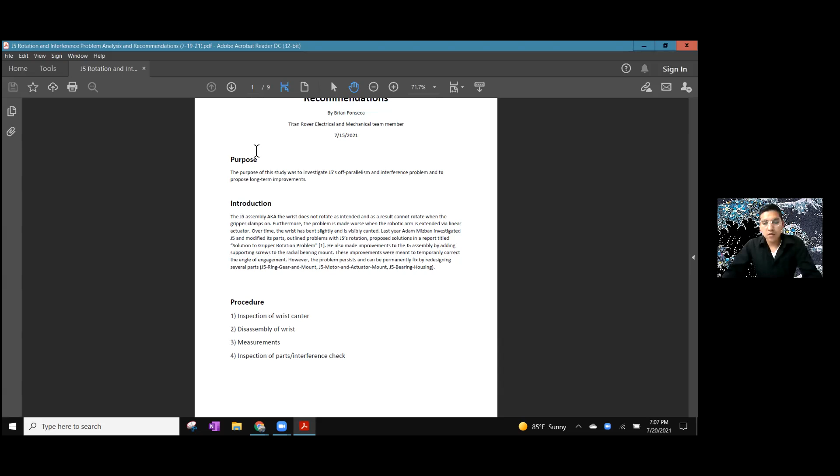Okay, so I'm just going to be talking about the results of, I guess, the study, if you want to call it that, of the cocking of the wrist. It's supposed to be straight up, and it's kind of cocked, kind of cantering. So basically, the wrist was not straight, and there might actually be a couple reasons, but I'll go through this kind of quickly.

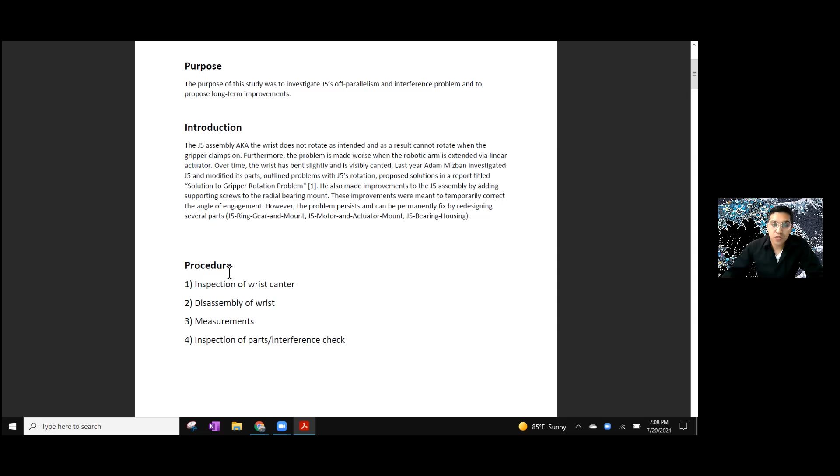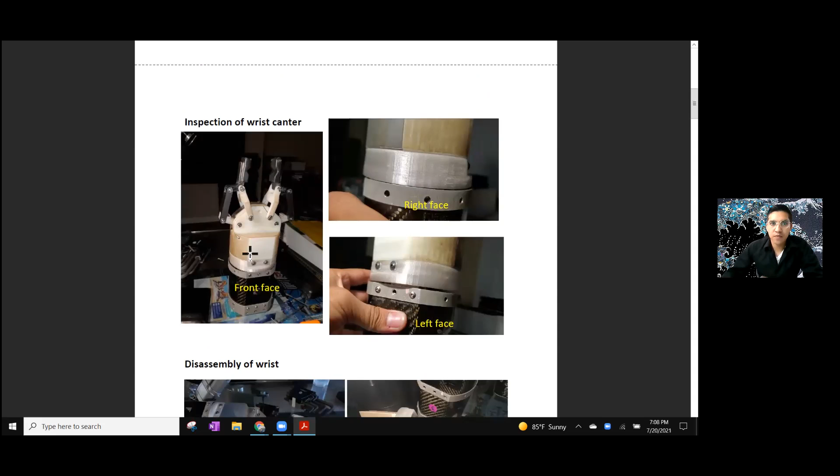So I went over to Roberts, and the wrist was already removed from the actual robotic arm. So all I really had to do was take apart the pins, some screws, the C clips on the pins and stuff. This image is actually from the very end. I realized I didn't take pictures before I disassembled it, so I ended up taking pictures at the very end just so that we know what it looks like.

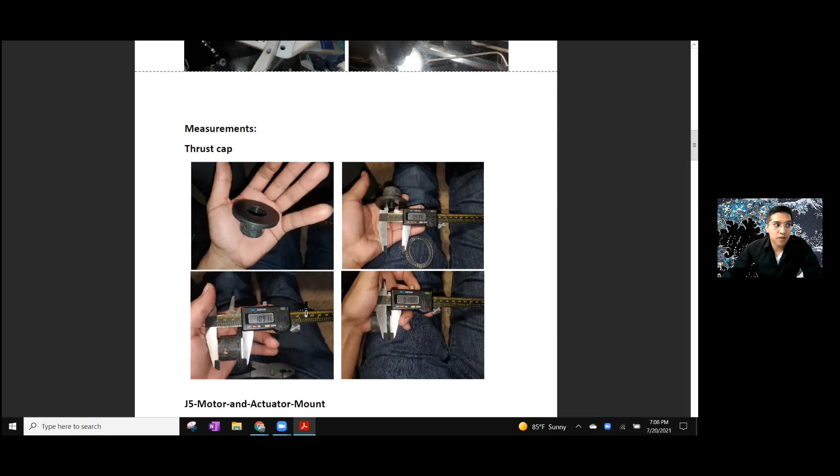Here are the pins being removed, the little C clips with the screwdriver. And then I measured some of these parts just to check for accuracy, how close it is to the SolidWorks design. So those are all just measurements. Here I'm highlighting some of the things that are the problem. This is one of the parts that needs to be redesigned. This has the ring gear on it, and what's happening is the ceiling, where you can see I'm circling here.

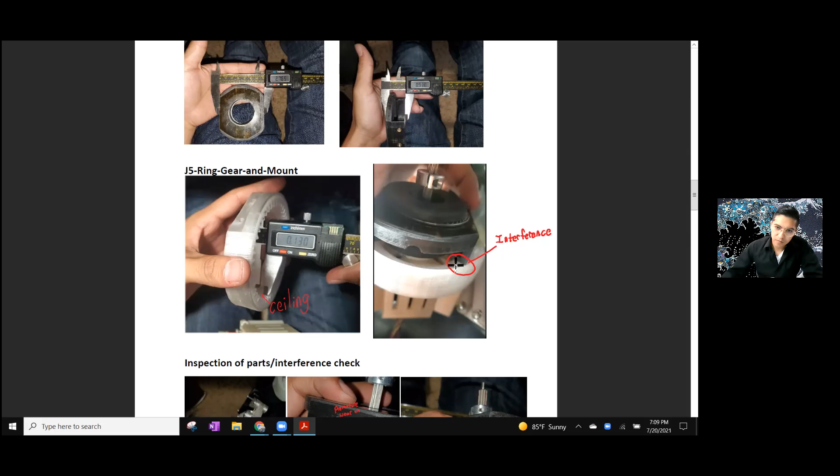It's touching this mount, this thrust bearing mount, and that is obviously going to cause a problem in terms of interference. So that's just the ceiling I'm pointing at here. I'm measuring the thickness of it because I'm wondering if we can make that thinner. That would be an easy thing to do in SolidWorks, but it's really thin already.

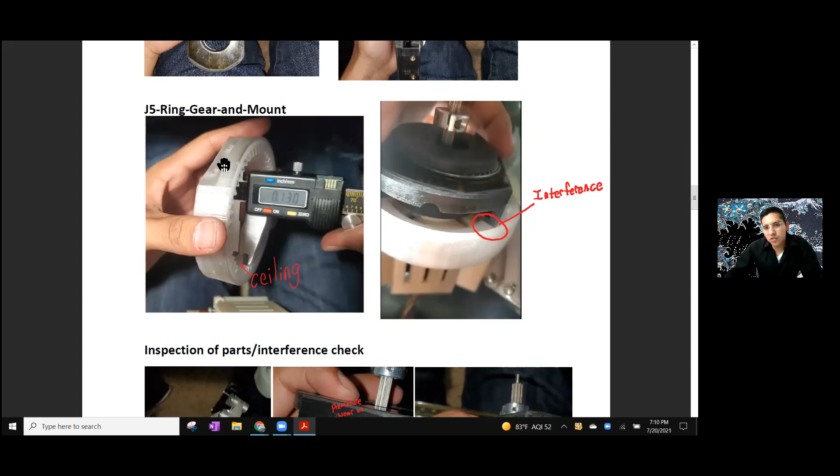So maybe what we might have to do for the redesign on this is pull this out, pull the bottom, the face of where the ring gear is, pull it out, extrude it out, and then cut this other face off a little bit by however much you pull it out. In effect, raising the ceiling. So yeah, in terms of redesign, that's what it would be.

And you're not worried? I don't know how experienced you are with 3D printing, but you're not worried that using another material is going to be too flexible and mess up the gearing? Well, in terms of material, I think it's definitely worth trying 100%. I don't know. That's a good question. I would assume that other testing, like simulating the stress testing within SolidWorks, would be a good idea.

I know you can set the material of the part that you're designing and then do, I don't know what it's called, it's not dimensional analysis, but it's where you check where you'd have stress points. Those gears are pretty easy to make. That's actually one thing that's pretty easy to make just using a toolbox.

So I have another question for you. Sorry if you hear my dog in the background. Oh yeah, no worries.

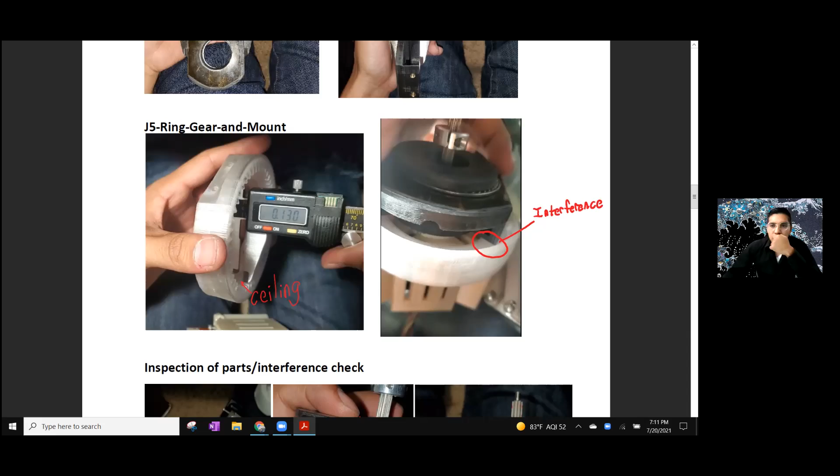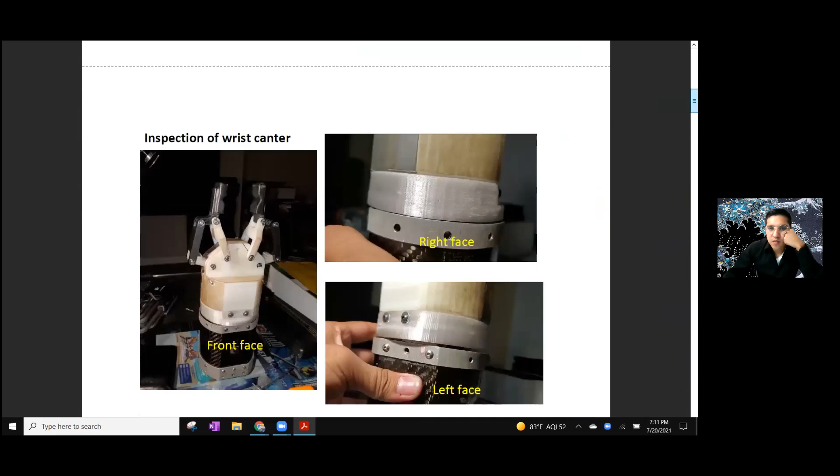Another question for you. How is that ring gear mounted on? Is it resting on the actual bearing right there, and that's how it's mounted, or is there a mount behind it? Okay, I think I know what you're asking, but basically, do you see this sleeve? This carbon fiber sleeve bolts on, or not, sorry, not the sleeve, the opposite part. Actually, in the pictures it'd be better. This is that part right here.

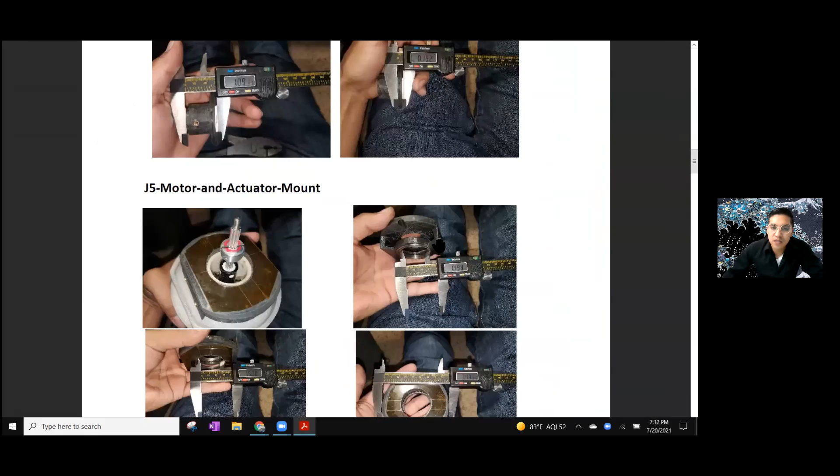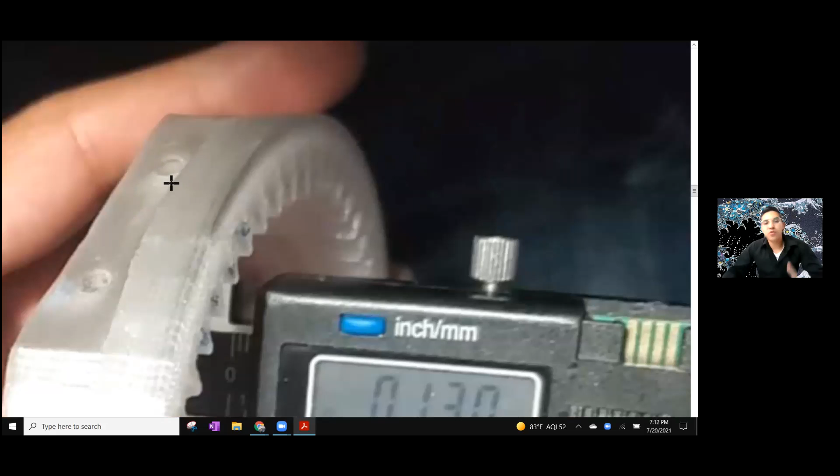Okay, yeah. And you see how there's a washer right there? There's another washer underneath in between. That's why there's little imprints of the washers. So there's washers on both sides. So I would say redesign that, because that's kind of hard to get in there to assemble it. You would have to redesign it, because if we have less of an extrude, we're going to ruin those holes right there anyways.

Well, that's what I'm saying. It depends on where they made the base from. Because if they made the base from where that ring gear is, I would assume it'd be harder. But if the base is on the top, then it really would just be extruding it out a little bit more. It just depends. Extruding it less, right? Not more. You wanted to make it thinner, not thicker. Right, actually, you're right. But again, it depends how they made the part.

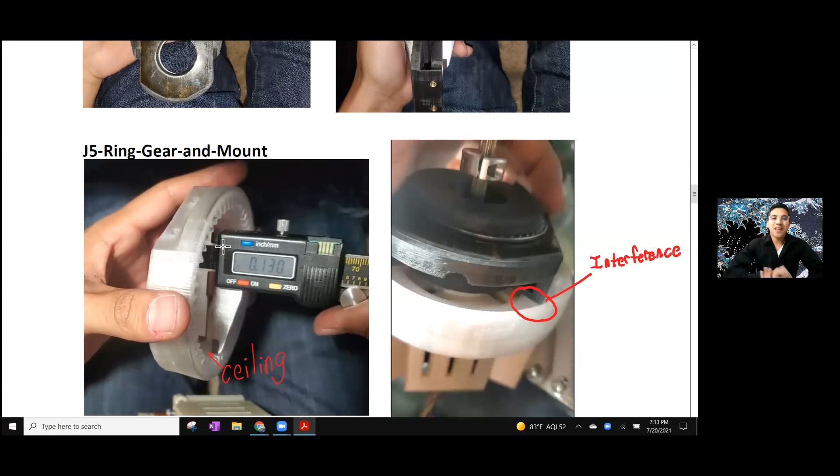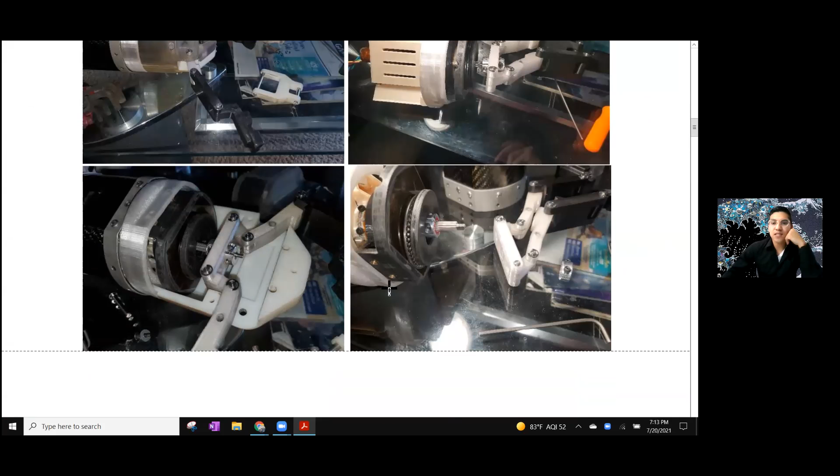Because another thing that I noticed that's kind of interesting, they split this part. There were a few things that I was wondering why they made it that way, and I'm sure there's a good reason, but I just didn't know why. So I haven't actually looked at that part. I guess the next step would be actually opening that part up and clicking on the different sketches to see what was done to make it. But it doesn't really seem like a hard part. No, it'd be so easy to manipulate that right now.

I think I might need to make it a point to get myself and hopefully a few more people to actually go to Roberts and look at it again so we can see in person what you've already seen. Yeah, that's actually a good point, because there were several things that I would have never realized, like the washer thing. Dude, that should be a redesign simply because that's annoying.

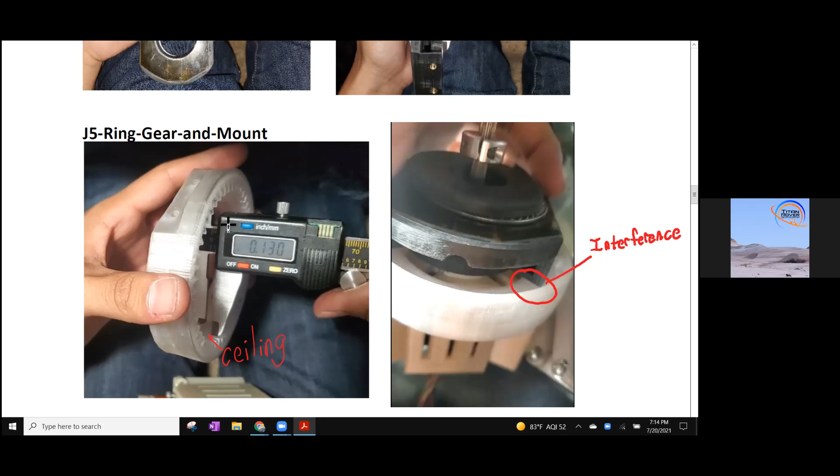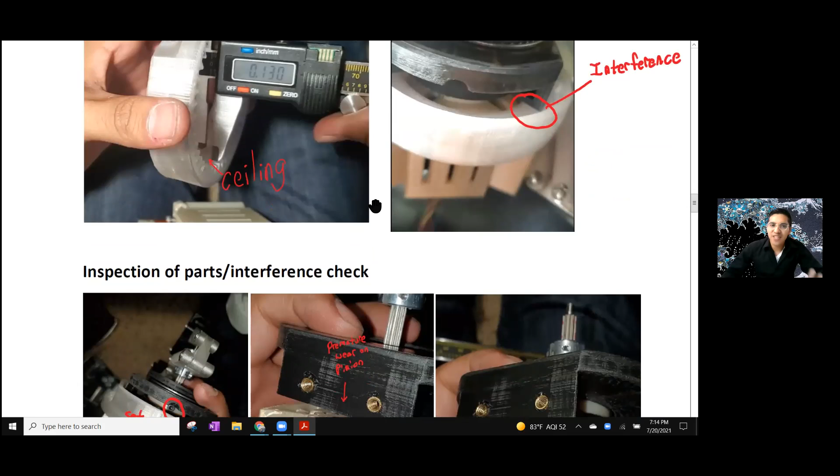Nobody wants to have to line it up with like a pick, and that's how the whole robotic arm is. Yeah, properly. The worst part. Well, we'll get to it. So anyway, that's probably the first thing that should be done. I laid it out in kind of most important and then least important, but really all of the things should be done.

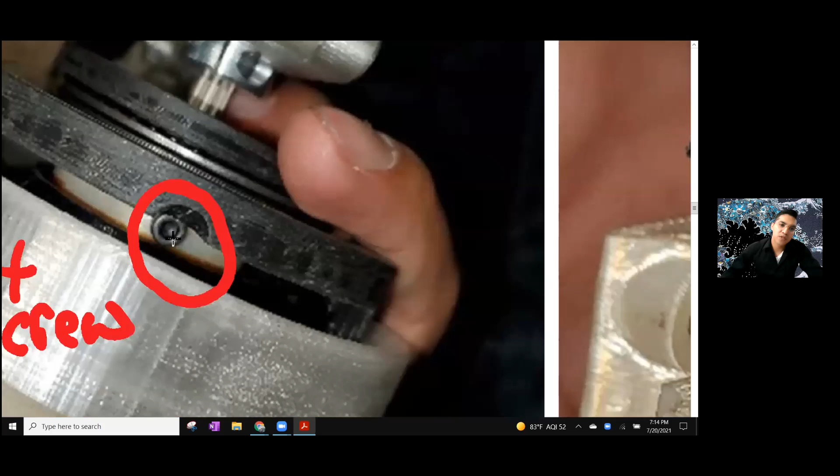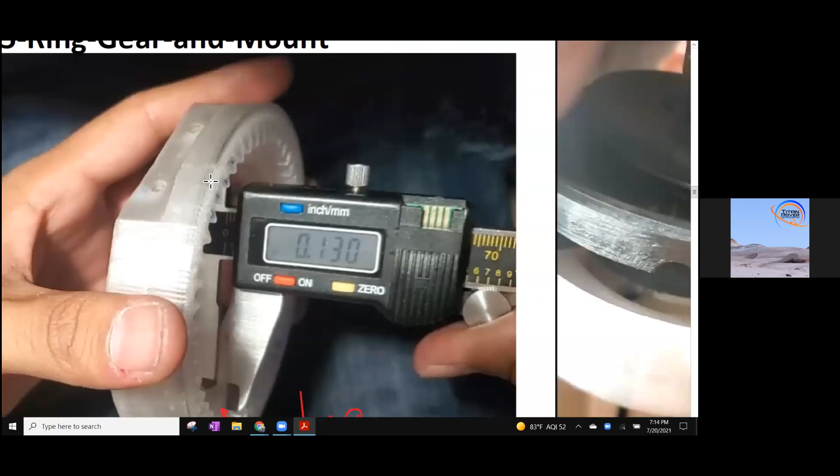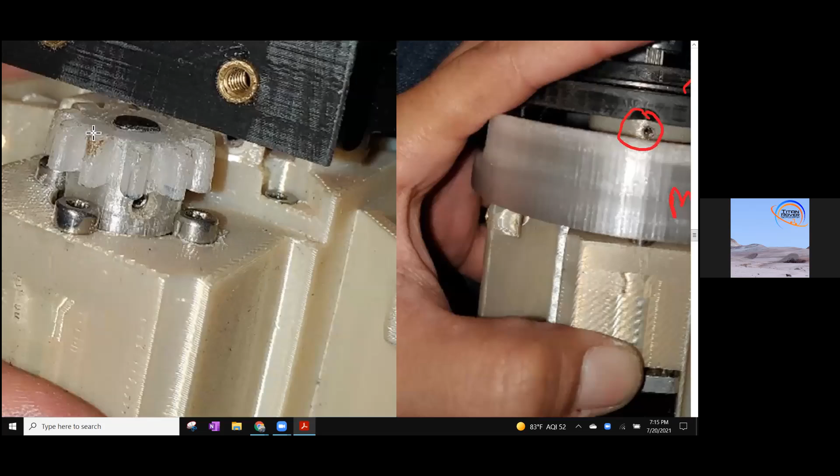So this is one of the set screws that I had to remove, this black thing. Oh wait, one more question, sorry. Back up to the ring gear you were talking about. Do you know if the actual gears were the correct thickness for whatever gear pinion was attached to it, or could I make those thinner? So you're talking about the ring gear or the spur? The ring gear right there, the white gear, not the spur gear. Could I make the actual gears themselves thinner, or should I just make that back mounting section thinner?

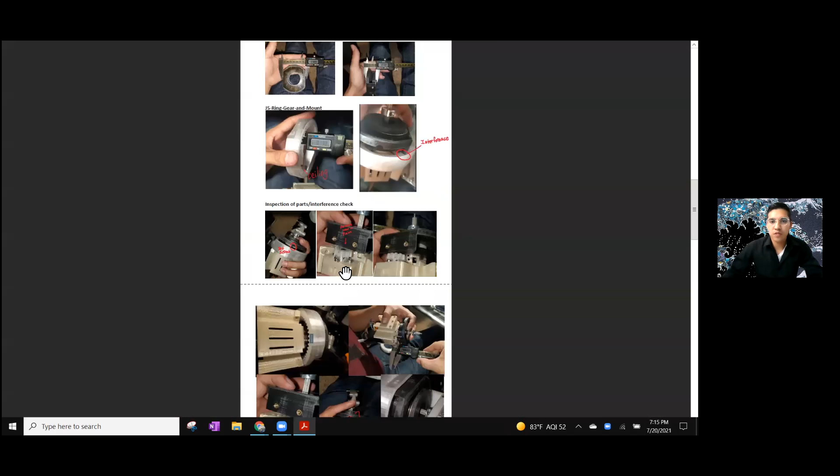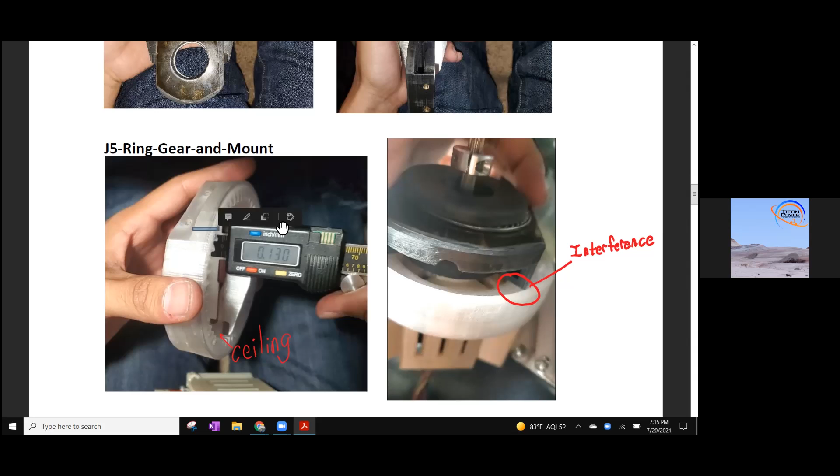Okay, so you're talking about this thickness right here? Yeah. Here, am I able to have control over your thing? Yep, go ahead. Let me set you up and then I'll hit approve. So this thickness right here, from there all the way across to right there. Could I make that thinner, or should I keep it?

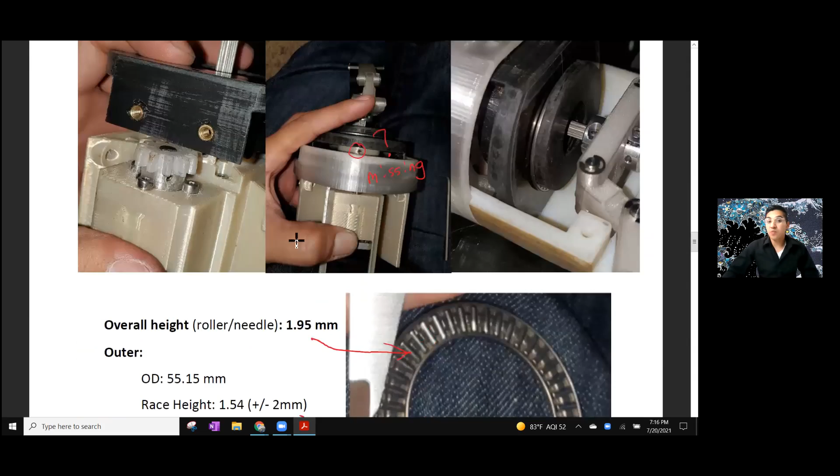Oh, I see what you're saying. Generally speaking, to be honest, I don't know. That's a good question. I would assume that this is deeper than the spur gear is high. But not only that, it looks like they ground this down because this actually is what interferes and probably is the reason these gears look like this. The little fins on this sprocket are really not too bad, because it's cocked, totally cocked.

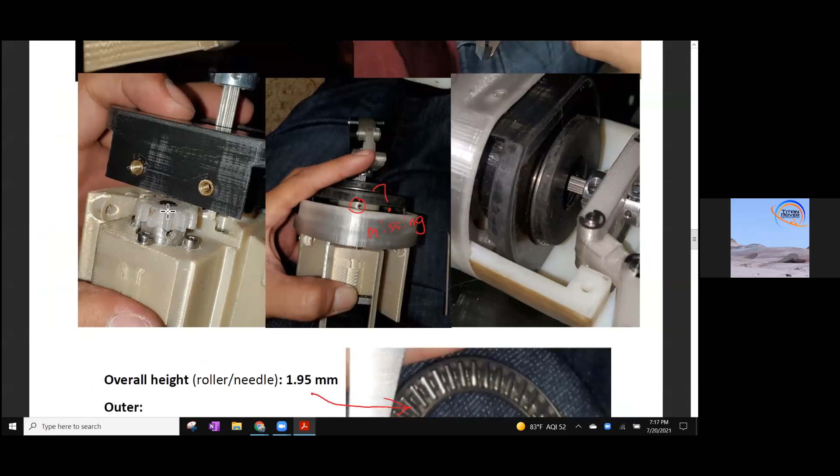I think part of the reason it's not as bad as it could have been is because this metal was giving it a little support, so the metal kept that clearance. But a really small detail like that, you can easily shave that down and make sure this thing is straight, and then you wouldn't have to worry about any of those things. You're talking about shaving down the spur gear? The shaft, the metal shaft. It's steel, not aluminum, the actual motor. So it'll take a little effort, but not a big deal.

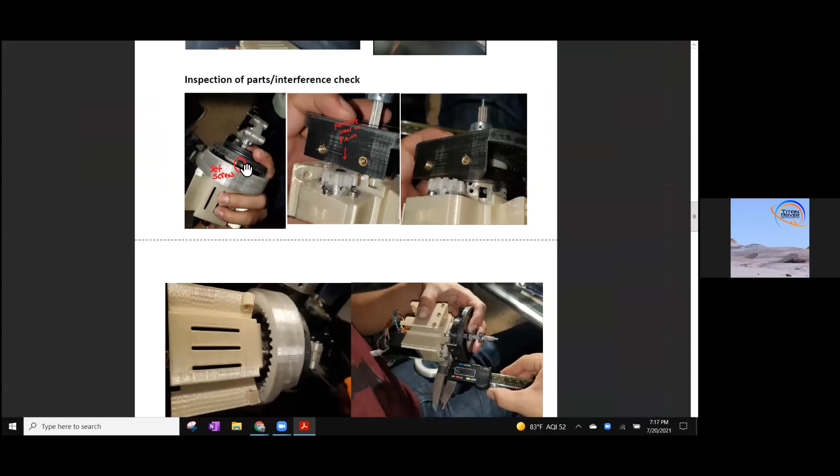I would take the spur off with that set screw and then file it down. Maybe paint it as it is right now, mark it, and then when you remove it you'll know how far to go down. Exactly. Then the set screw, this is a really big one because that's basically free. You just need to put another set screw on the other side. It was missing from the other side, you said. Was that a temporary fix that they did?

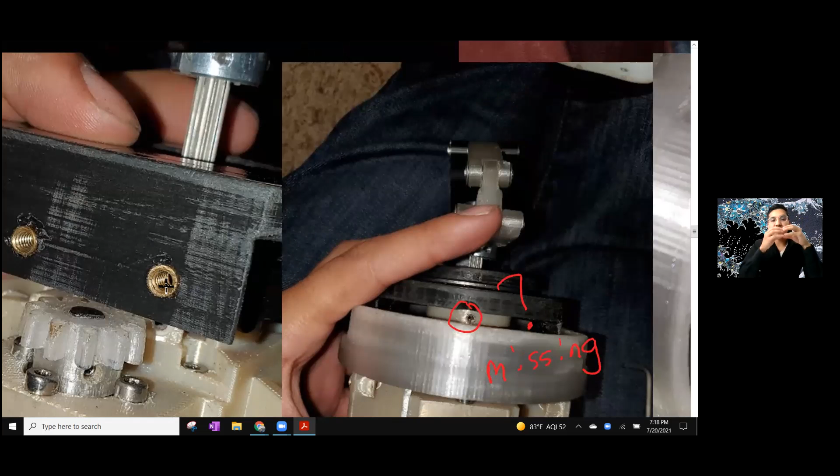I don't know the story behind this, but it does seem like it now that I think about it, because it almost seems as if they heated it up and pressed it through. When I was putting it in, it feels like you're stripping it because it's not supposed to catch, but it catches through the printed part. Then finally there's a brass threaded insert on the other side of this plastic, and it catches that and feels good with resistance. But the entire time it passes through the plastic, it doesn't feel right.

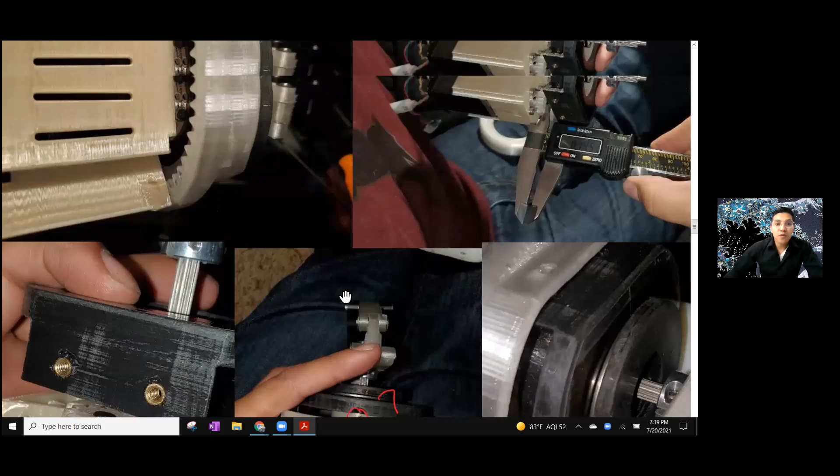So to be honest, it wouldn't surprise me if on this side the insert was stripped. Yeah, with the amount of force acting on that, I'm sure they're all stripped out. This one wasn't. The threads were all fine inside of it. Okay. So anyway, definitely first see if it's stripped or not, which is easy. Just take it apart and look at it.

You just remove this screw that's in there and put it on the other side, making sure it's fine. That's an easy way. And then just buy another one, or you probably already have one somewhere.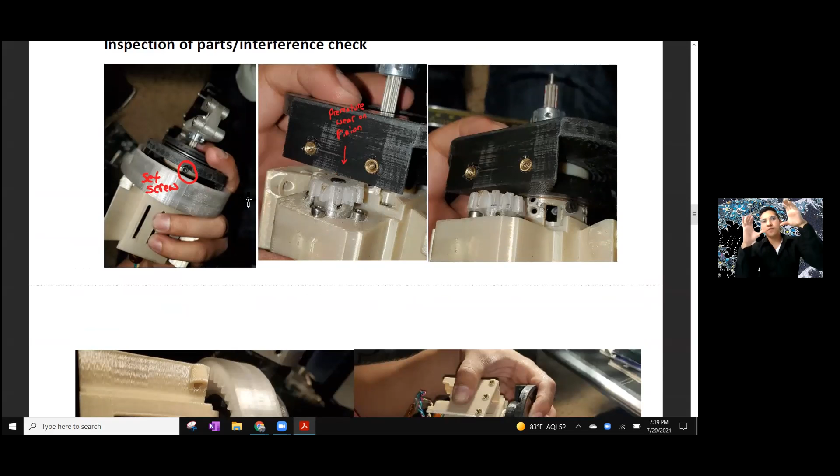But yeah, that definitely has to be done. That's like the easiest thing because that is supposed to prevent it from tipping. So big deal, but small fix, easy solution.

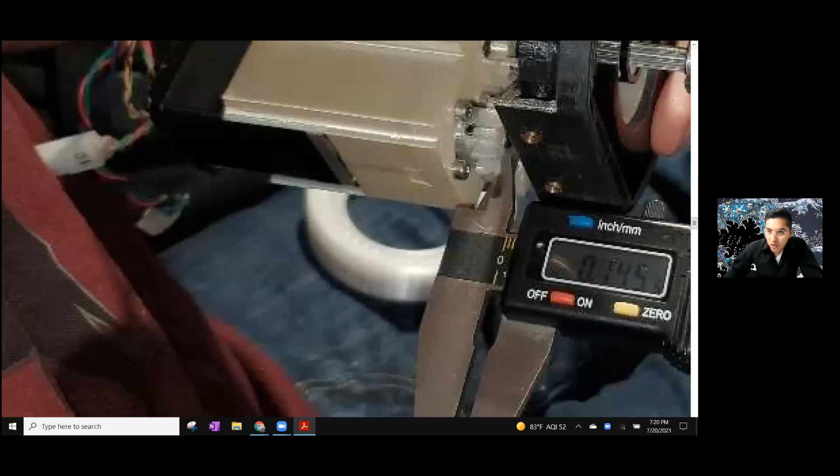Here I did measure the height of that clearance between that sprocket and the part that's actually rotating. The other part, the ring gear part, is not on here, that's the only reason I can measure it, if that makes sense. Anyway, that's really small. I don't know if later that might give us trouble, but it just seemed kind of scary.

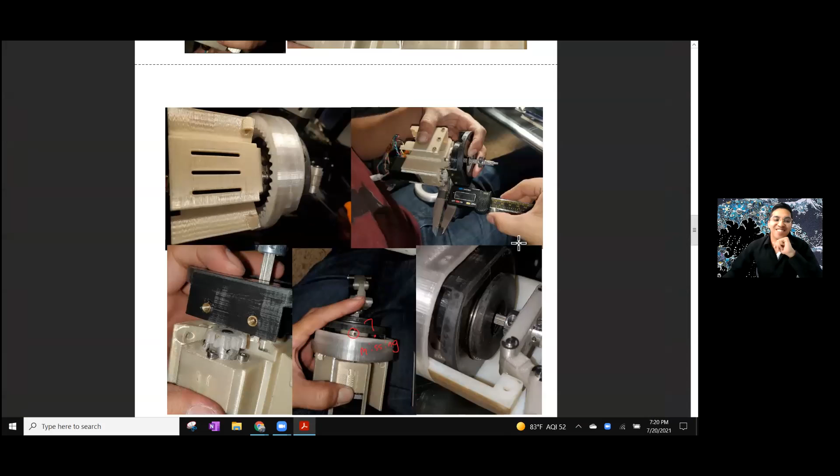This is the same height right here, it's about 0.145 inches. So anyway, this is the real big reason that I took some measurements. This is the whole point of the study, which is to figure out why this guy isn't doing its job.

So to set this height, we obviously want to move this part, this black part, forward so that this metal thrust bearing here actually supports this black part right here. It's sandwiched in between.

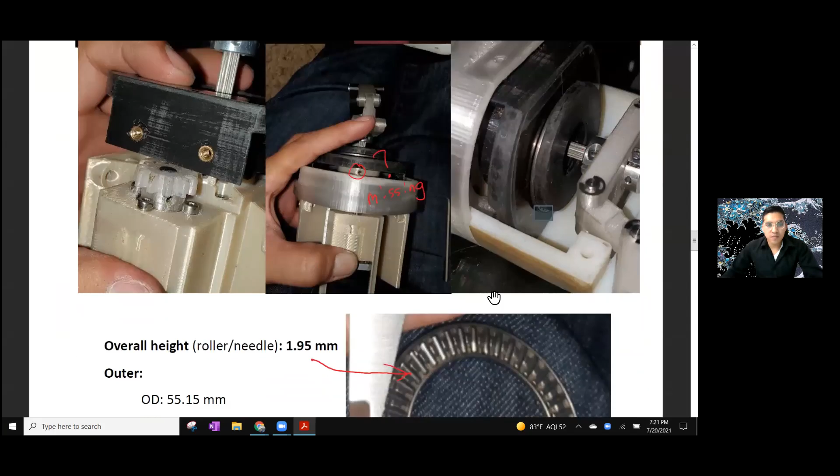Yeah, because it's not supposed to be sagging the way it is. See, there's a gap over here and it's sticking out over here. It's because it's not centered, and it's pretty obvious. It's actually way clearer in Adam's report.

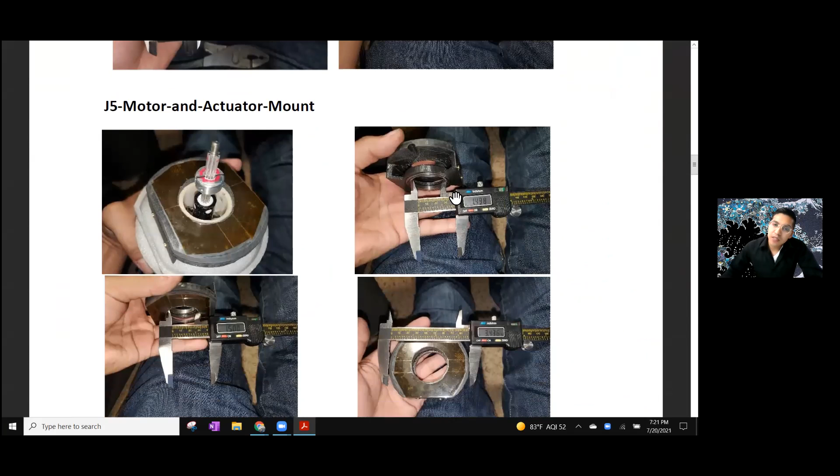What Adam did is he fixed this part. You see this bearing right here? That's a radial bearing. That bearing is being supported by 4 Allen screws that look like this.

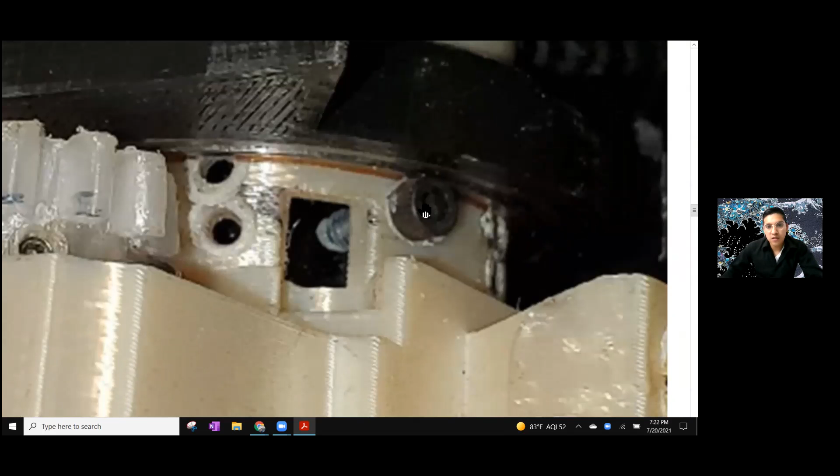These 2 screws go into these 2 screw holes here. There's 2 more over here, and there's 4 others on the opposite side. Those were done by Adam, obviously on accident, because I'm assuming he was trying to find the right height, and he realized it's much more difficult than just eyeballing a hole into it.

The easy solution would be to put washers, basically spacers. If the spacer went around this head, and we'll say the spacer is 2 millimeters bigger in diameter, that's 2 divided by 2 is 1, so a 1 millimeter height increase.

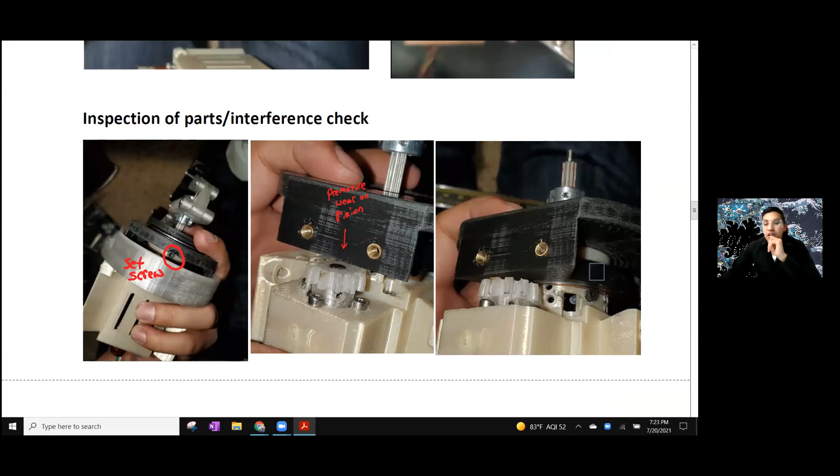So it would essentially push this black part up so that it sits higher, and then it actually sandwiches this guy. Putting a spacer on the head of the screw kind of sounds rigged to me, kind of janky. Oh yeah, for sure. But at the same time, this is not a part that is easy to make.

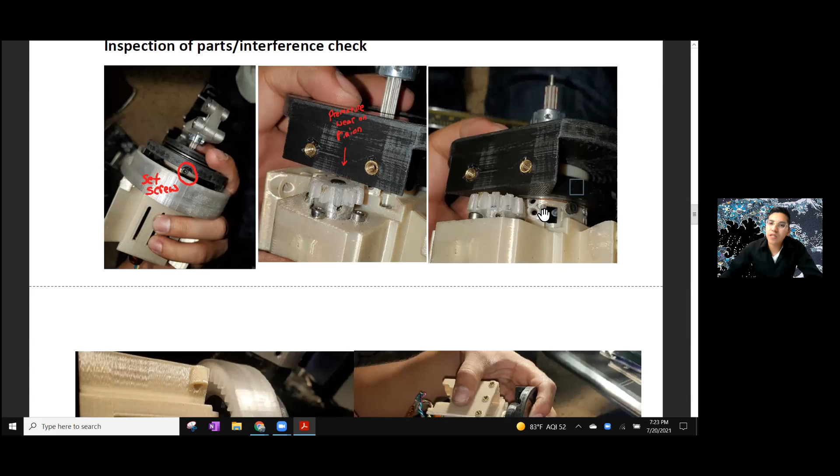If you look at this, this is the gearbox, or this houses the motor. That's what it is, it houses the motor. It's got a thin sleeve that holds this black part. It's not an easy part to make. This is it right here.

But can't you put a spacer between the gearbox and that black part right there, rather than? You can, and that's what I was gonna say too. Then you'd have to file it down in a different place.

Honestly, I recommend redoing the whole thing. Like, why not? We have the time for it, honestly. I mean, you don't even have to redo it, you just have to modify it.

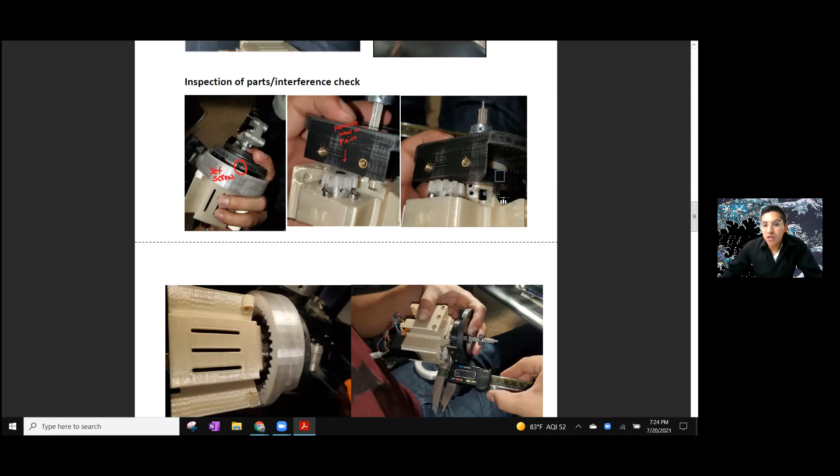So if you didn't want to redo it, which I would understand, you could. This is something I didn't include in the report, but you could plastic weld, basically glue a sleeve at the right height, if that makes sense. And that would act as your flange. The spacer is placed inside there, glued in so it can't move around. Essentially doing the same thing that you would in a redesign, which is adding material.

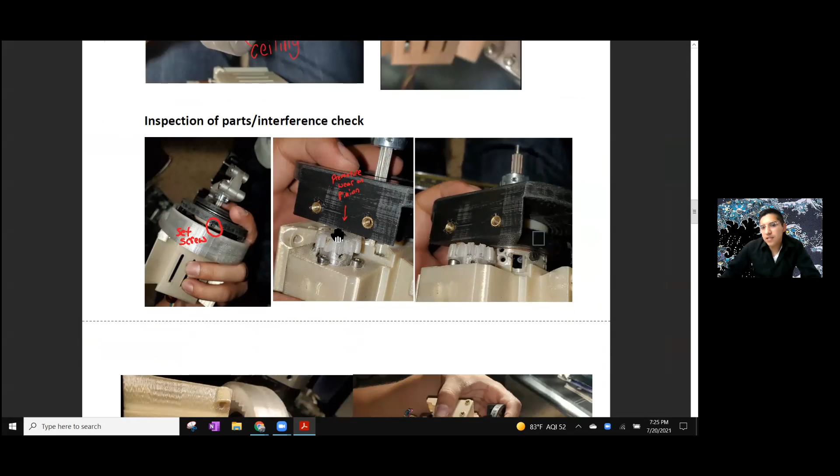But all you really need is a ring, just a flange around where you want it to sit. So that's there. Like I said, that's kind of concerning, but again, if we fix the ceiling, that problem should go away, which is the shaft kind of sticks out above the spur.

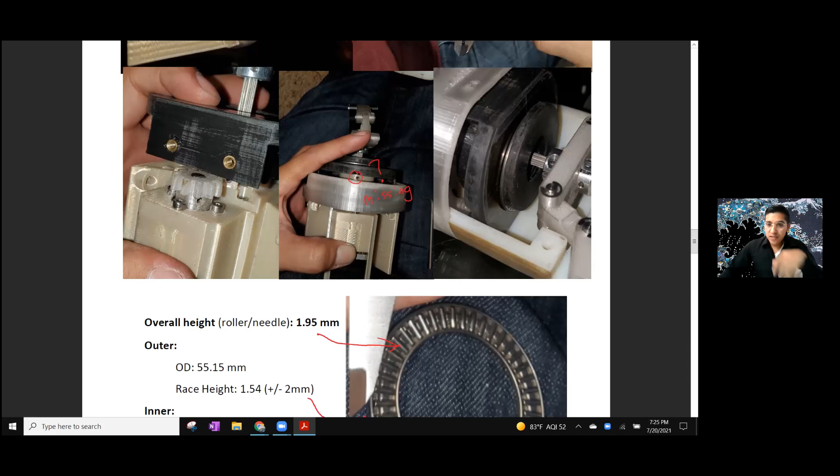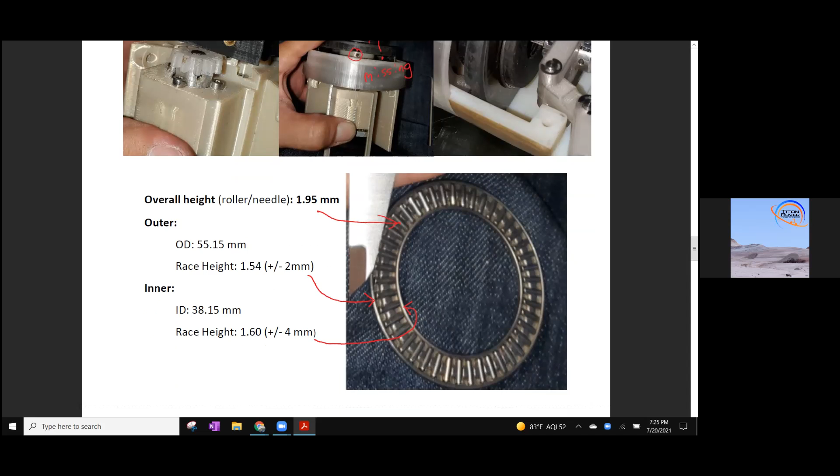Yeah, the missing screw. And then this, you just obviously have to hold it. You could sink the bearing, the thrust bearing, but I don't know if that's a good idea. Instead of making a ridge on the inside or outside of it, you could just put a hole that is maybe a little bit bigger than this, so it fits inside that hole, basically a countersink. Yeah, make a female component so the male can just go right in.

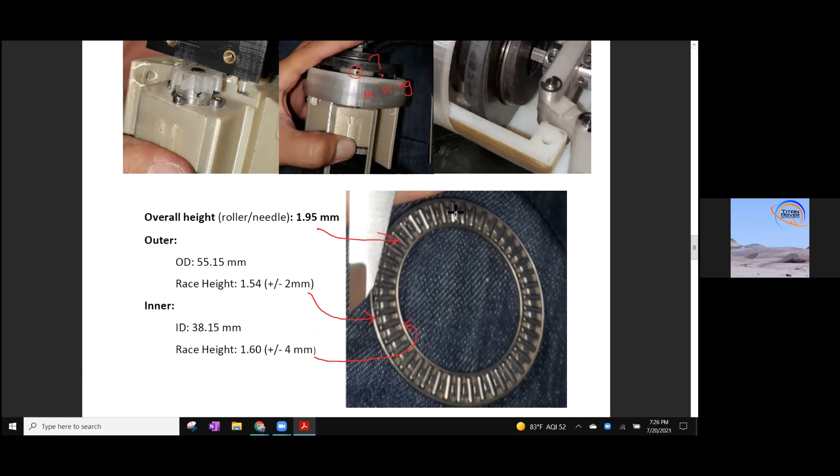Yeah, that would center it, but that would change the height too, so you have to keep that into consideration. When this was first being built, I was talking to Jose about it. I was actually talking about the other thrust bearing, but he brought up this one, so I was like, oh, it's going to move around. And he said as long as it's sandwiched or compressed properly, it won't move.

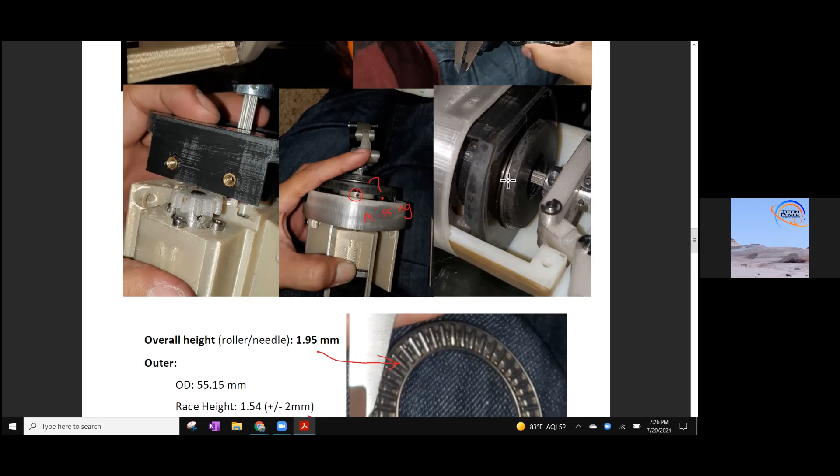No, totally not true, because the arm is constantly in a sagging position. So unless it was straight up, then you could argue that, because you have to understand it has to move in a concentric path. If it's sagged, it's not concentric, so it doesn't do its job. It doesn't provide reduced friction around a certain diameter because it's not going around that diameter.

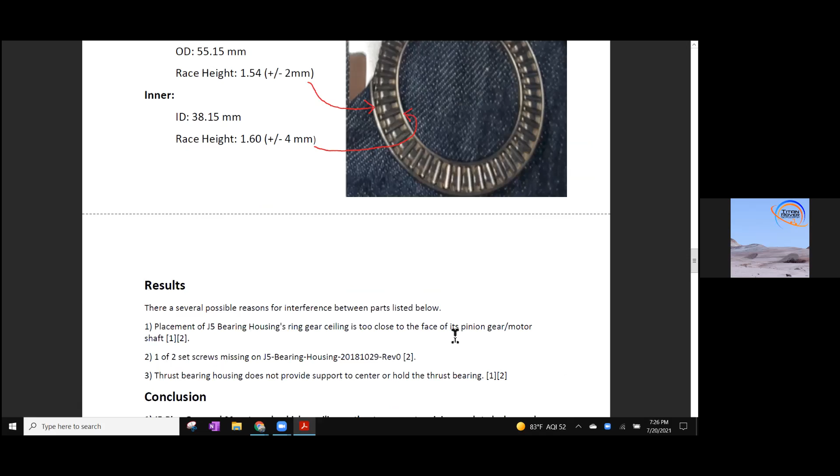Yeah, okay, so that is summarized here. It goes all the way up to five.

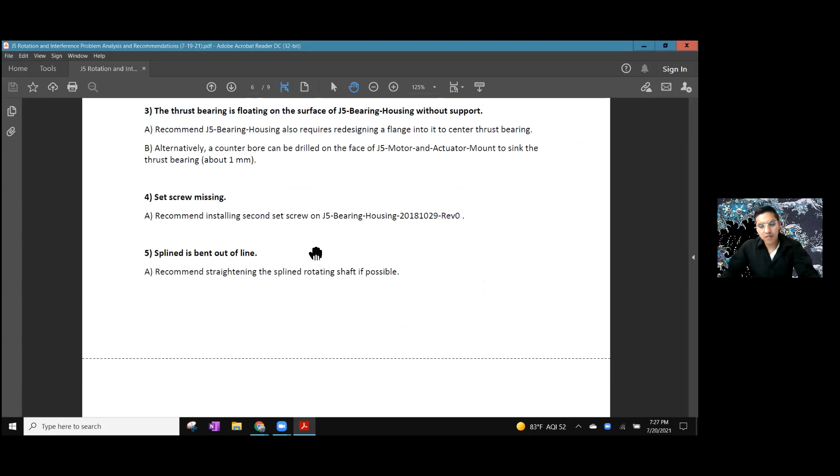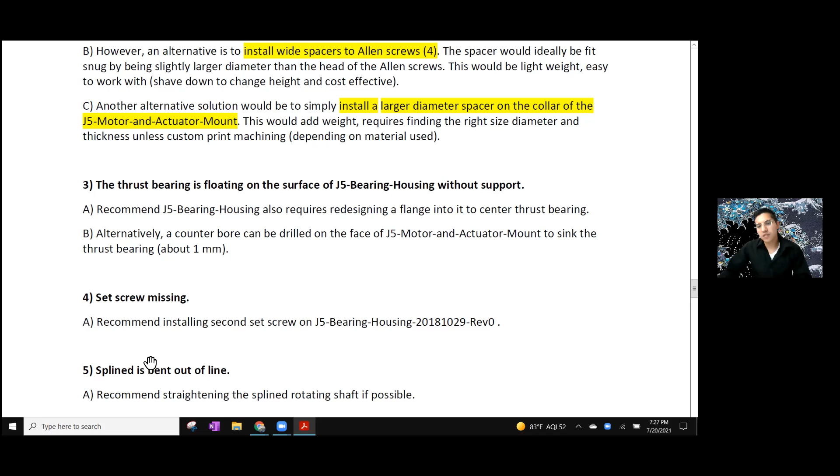Oh, also the spline is obviously bent, so maybe bending it straight would be a good idea. Would you be able to show me a picture of the bend, or did you not have one? I didn't, this is the only one. I mean, I'm sure there are more pictures, but not one that shows it. There might be one, but I really don't think so.

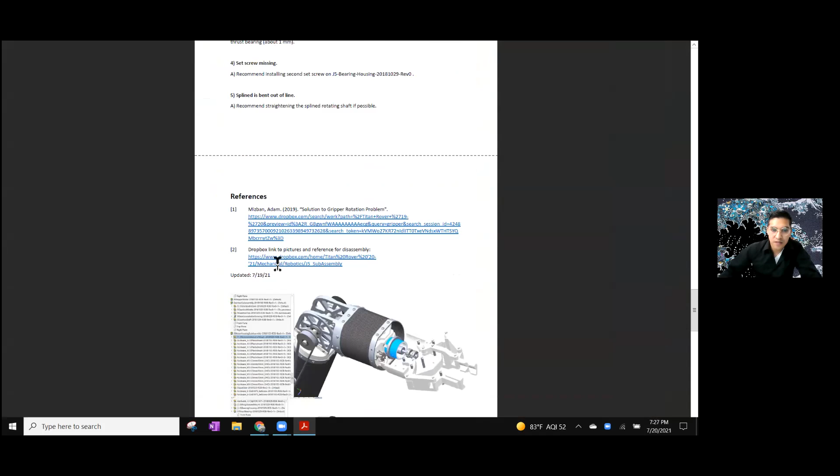Is the spline the motor shaft? Yes, I think so. So that might require a whole new redesign if it's bending the actual shaft, because that's just dangerous. No, I think it's bending because of the problem, because it wasn't built right. Those things that we're fixing weren't fixed, so if we fix those, it shouldn't have that issue.

Okay, yeah, so that's what I'm saying, maybe bend it, but for long term, probably not. If it's already slightly bent, I would bend it back for competition, but I'd sure not buy a whole new motor, because bending it, it's not the motor shaft. Actually, I don't know.

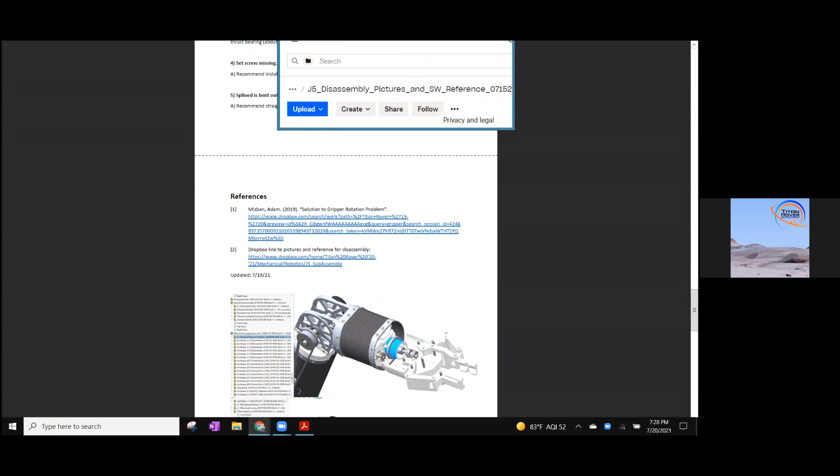I'm wondering if there's a better way of searching this. I don't think there is. Let's see. I don't think there was a good image of it. I kind of actually noticed it last minute.

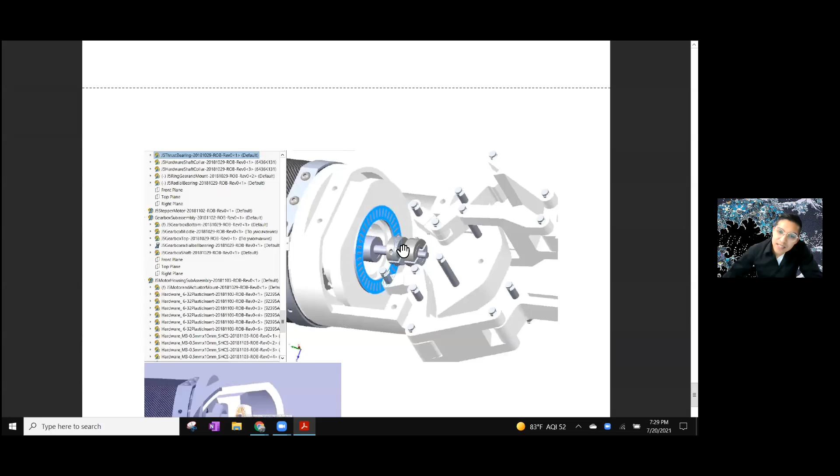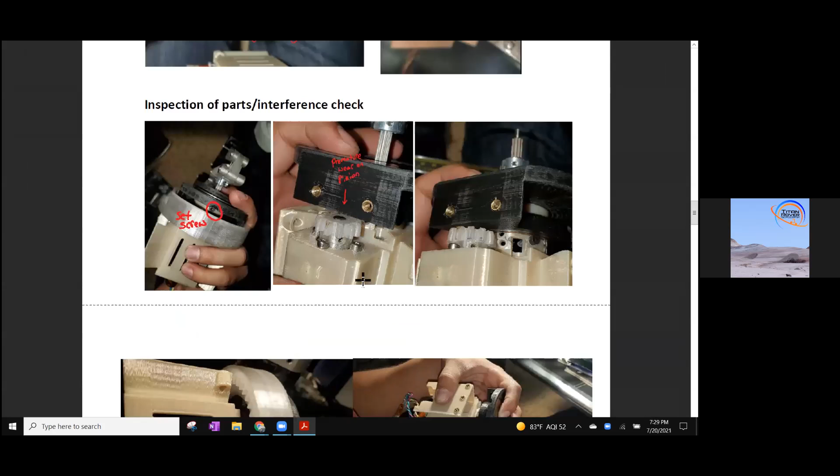But yeah, basically, oh wait, we have the... yeah, it's not the same shaft, so I wasn't sure, you see what I'm saying? So yeah, I'm not sure. I mean, you could have easily investigated with it in front of you, but I just wasn't thinking about it at the time. But yeah, I would just bend it back, worst case scenario.

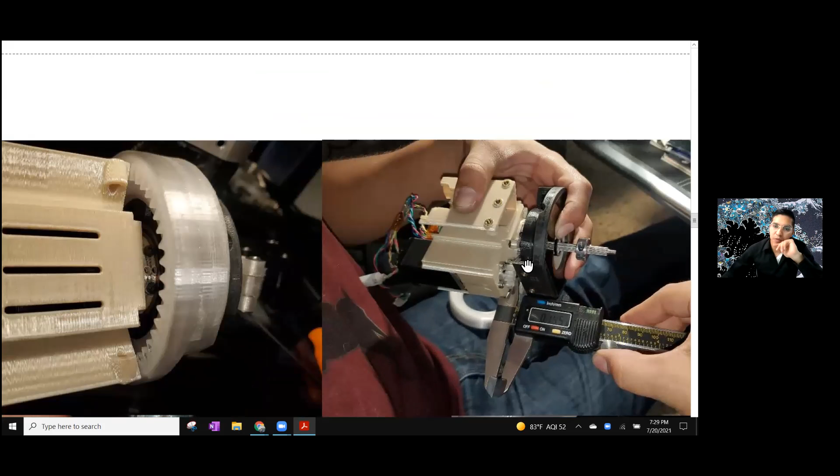My guess though is that that's not coming from the motor. My guess is that it's clamped onto the shaft of the motor, but I don't know. Okay, go check it out.

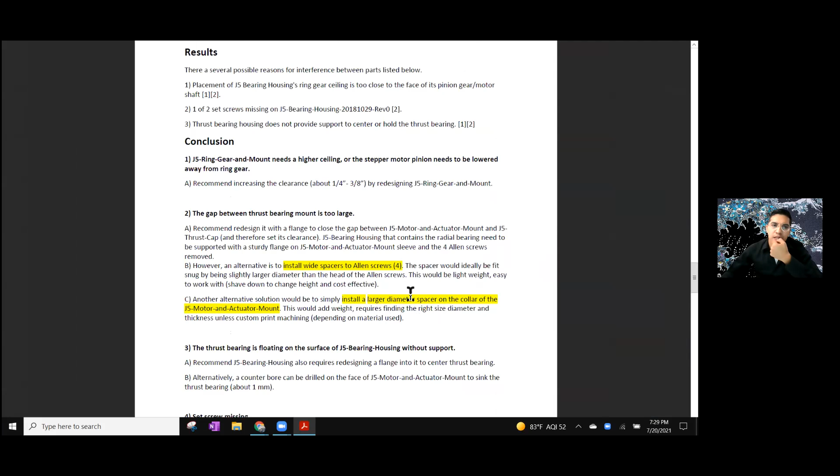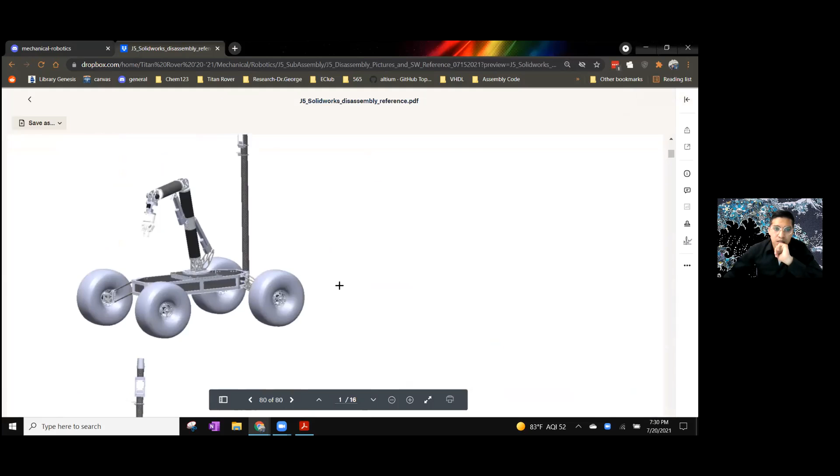Yeah, other than that, everything is pretty much laid out in there. There's a bunch of pictures that I took that are in that link, and also there's this thing that I put up, I called it disassembly reference. It's basically a OneNote of a bunch of pictures of the rover.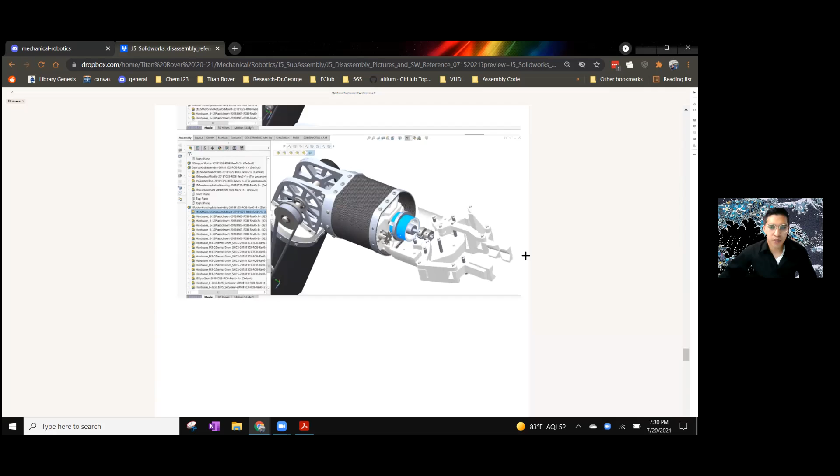In different parts, I don't know if you've already taken a look into it, but it's pretty helpful. When I work on a car, the worst part is not having the manual, because then you don't know what bolts you have to undo or what C clips to undo, so this is really helpful for that. I mean, obviously whoever designed it did most of the work, I just took a bunch of pictures, and included some pictures in there that I was using to put the report together. But some of those pictures didn't make it into the report. Other than that, everything's there. I try to highlight stuff so you can see what they're called.

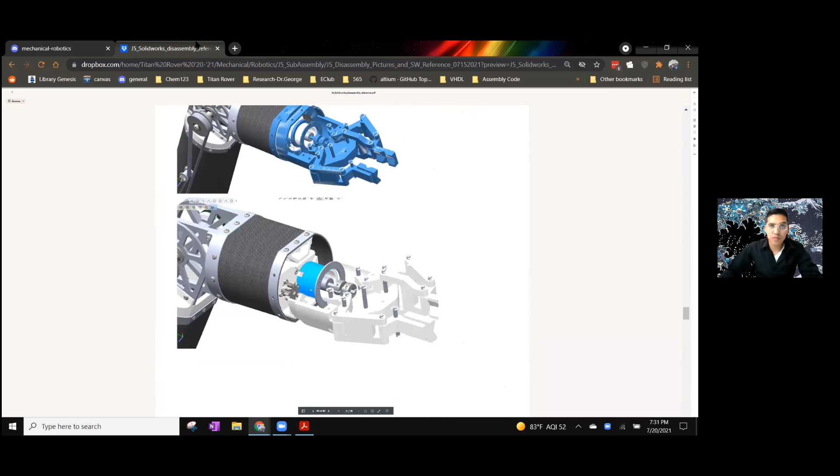But yeah, do you have any questions? I know there's no one else, the other guy left. I don't have any questions, that was really helpful. I think the first thing I'm gonna do right now is try to get everyone together to go look at the gripper in person, so we can experience what you've experienced. I really wish I could have been there when you were there, but I had plans that night, so I wasn't able to.

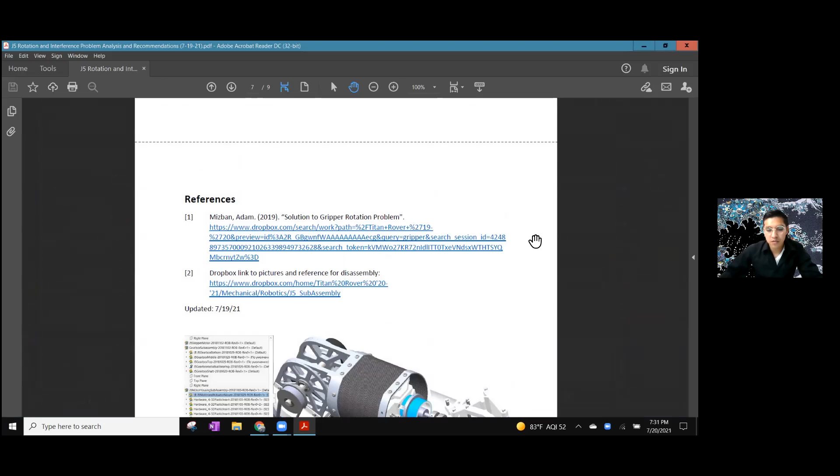No worries, we'll start working as soon as possible on getting those little fixes they were talking about done.

With time, I don't want to do anything that's a quick fix. I would like to fix it well, once, and be done with it. As a permanent solution, definitely not gluing stuff on there, but I think there is a lot of value in just getting things to work.

So like say if Robert wanted to work on improving the joystick feature and he just needed something to work, obviously get it to work. But I'm not proposing replacing the materials that are used with lesser or different materials in general. I'm saying we need to redesign it, or at least improve it.

Whether or not we actually get it printed, machined, or otherwise manufactured, that's a different story. But I would even argue you could probably 3D print it with DIY grade plastics, because I've seen it done in other projects. So it's possible, but it also depends on how much mass the whole thing is. I really think it would be easy to reduce the mass of the rover, of the robotic arm at least, but not without a redesign.